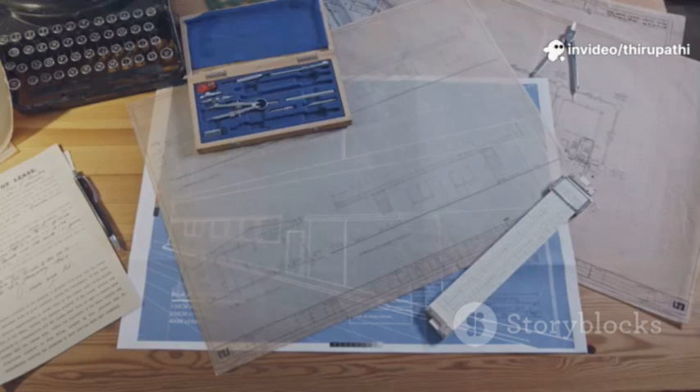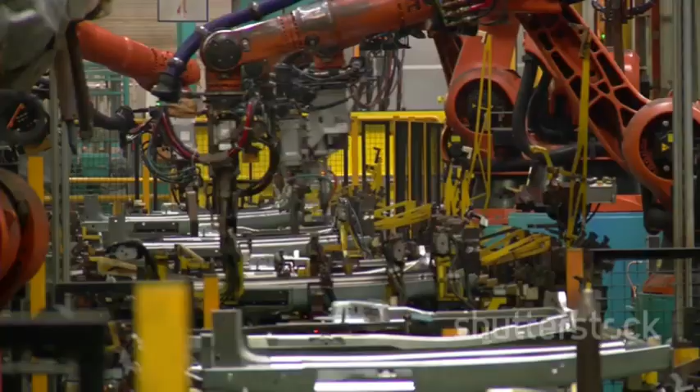Before the advent of glowing screens and complex software, there was wood, graphite, and steel. These were the fundamental tools of creation, the instruments that brought imagination to life. The world's cars, from their initial concepts to their intricate designs, buildings reaching for the sky, and complex machines, the gears of industry, all began on a drafting table, a massive tilted wooden board, a landscape for innovation.

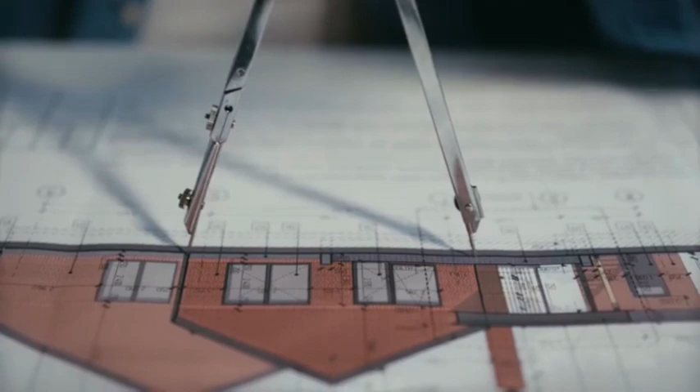It was here that ideas took shape, where visions were meticulously translated into tangible plans. Engineers used T-squares, sliding them across the surface with practiced ease, set squares, carefully positioned to create precise angles, and compasses for perfect lines and circles, ensuring accuracy in every detail. These tools were extensions of their minds, translating thought into form.

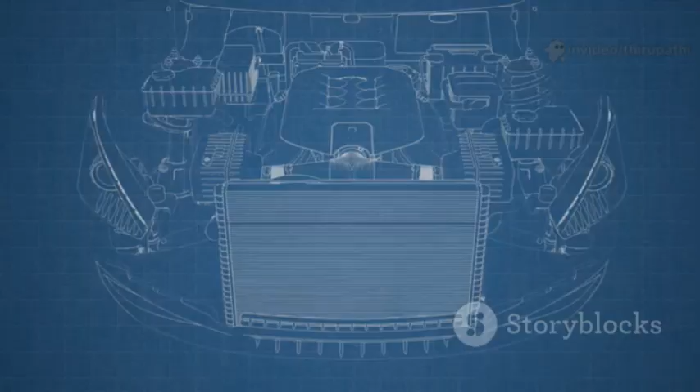Every line was a commitment, a decision etched onto paper. Mistakes meant hours lost, painstakingly correcting errors that could ripple through the entire design. Architects and engineers spent weeks hunched over vast sheets, their eyes scanning every detail, each line representing a real-world part, a component with a specific function and purpose.

Precision was everything, the key to success. One millimeter off, and a steel beam might not fit, jeopardizing the entire structure. There was no undo button, no quick fix, only careful erasing and hope you didn't tear the paper, a constant reminder of the fragility of the process.

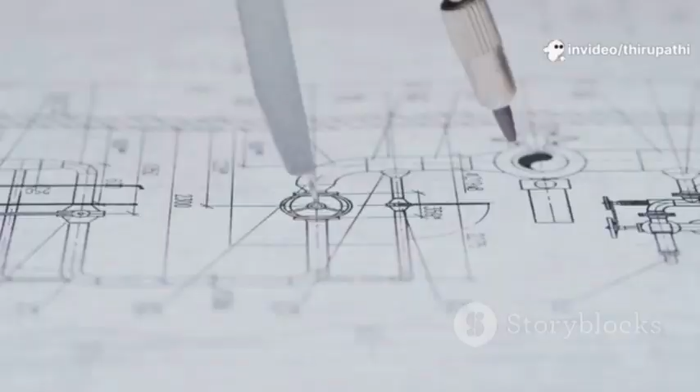This process demanded patience, a virtue often tested, visualization, the ability to see the finished product in your mind's eye, and deep understanding of the underlying principles.

Rooms filled with blueprints, stacks upon stacks, were the ultimate source of truth for builders and machinists, the guides that transformed drawings into reality. The discipline and foresight learned here in these spaces of focused creation laid the foundation for modern engineering, shaping the way we design and build today.

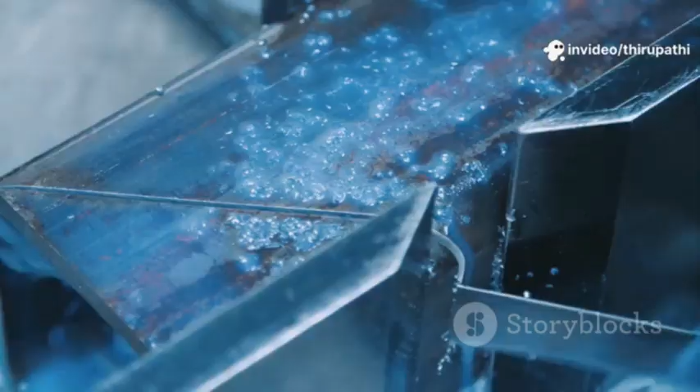You had to think in 3D, visualizing the object in its entirety, then translate it to 2D lines and symbols, a process of abstraction and simplification.

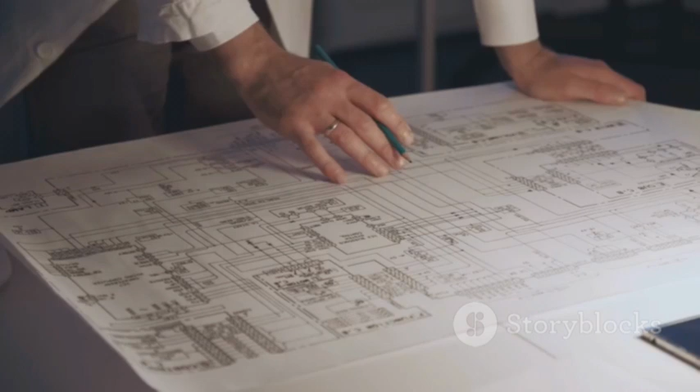This hands-on connection to design, the feel of the pencil on paper, is something we risk losing in the digital age, as we become more reliant on automated tools. But it taught engineers to plan every step before making a mark, to consider the consequences of each decision.

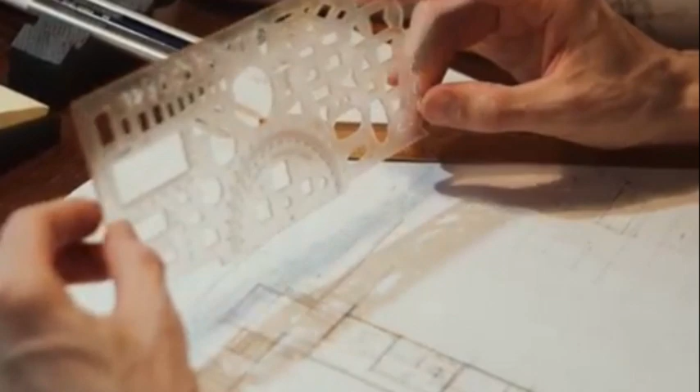The drafting table was the crucible where modern engineering was forged, a place of intense focus and creativity. It was slow, methodical, and deeply personal, a reflection of the individual's skill and dedication. Every project was a test of skill and patience, a challenge to overcome with ingenuity and precision.

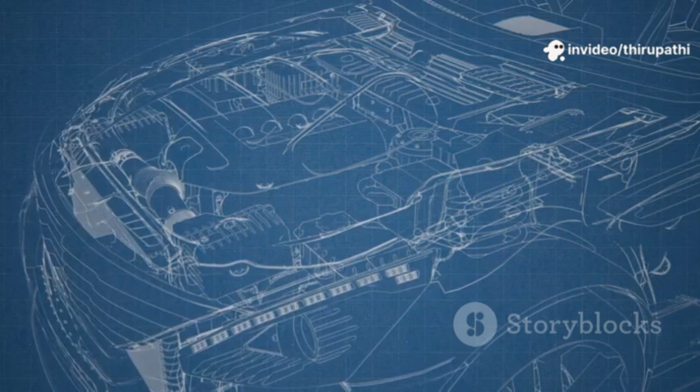The lessons learned here still echo in today's digital world, reminding us of the importance of careful planning and attention to detail. The roots of every skyscraper and engine, every bridge and airplane trace back to these tables, to the hands that meticulously crafted their designs. This was where the future began, where the seeds of innovation were sown, and where the world as we know it was first imagined.

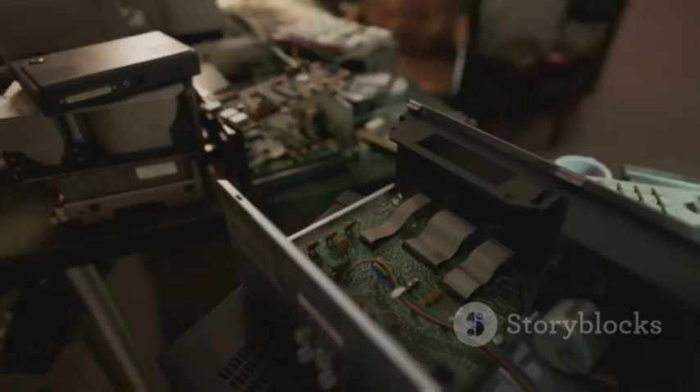Then came the computer, a monumental shift in how we approach design and engineering. It wasn't just a tool, it was a new way of thinking, massive, humming with the power of countless vacuum tubes, and deeply mysterious to those who hadn't yet grasped its potential. These machines filled entire rooms, their presence both imposing and intriguing.

Early mainframes weren't designed for drawing intricate designs or visualizing complex structures. They crunched numbers with relentless efficiency, processed vast amounts of data, and even broke complex military codes during the Cold War. They were the number-crunching powerhouses of their time.

But curiosity, as it always does, sparked innovation and pushed the boundaries of what these machines could do. Engineers and scientists began to wonder, could these computers be used for more than just calculations?

Ivan Sutherland's groundbreaking Sketchpad in 1963 allowed people to interact with the digital world in a completely new way, letting them draw directly on a screen with a revolutionary device called a light pen. This was more than just drawing. This was the birth of computer-aided design, CAD, a concept that would forever change the landscape of engineering and architecture.

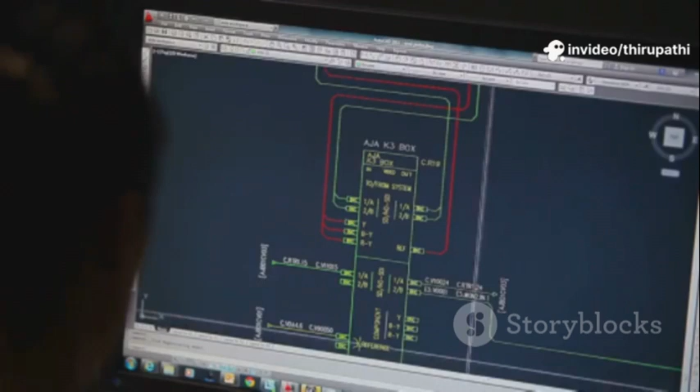Suddenly, instead of painstakingly redrawing entire blueprints, you could move a car door handle on a screen with a few simple commands, making adjustments and refinements without having to redraw everything from scratch. The promise, the tantalizing vision, was speed, unparalleled efficiency in the design process, and freedom from the tedious, repetitive task of redrawing everything by hand.

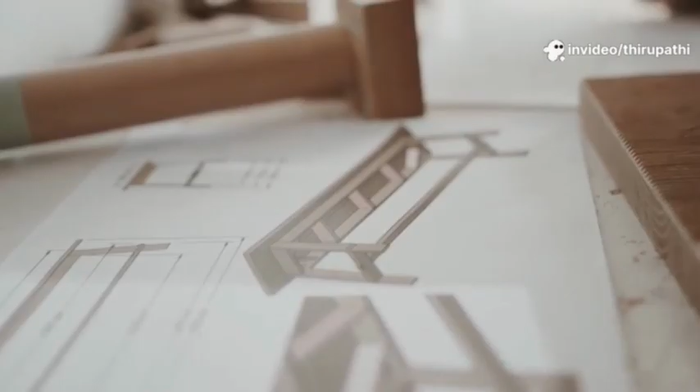Early CAD systems were undeniably expensive and incredibly complex, making them primarily reserved for the giants in industries like aerospace, where precision and innovation were paramount, and automotive, where the ability to quickly iterate on designs could lead to significant competitive advantages. The software itself was often slow and clunky by today's standards, screens flickered with an almost hypnotic rhythm, and the learning curve was steep, making it tough for many to adopt.

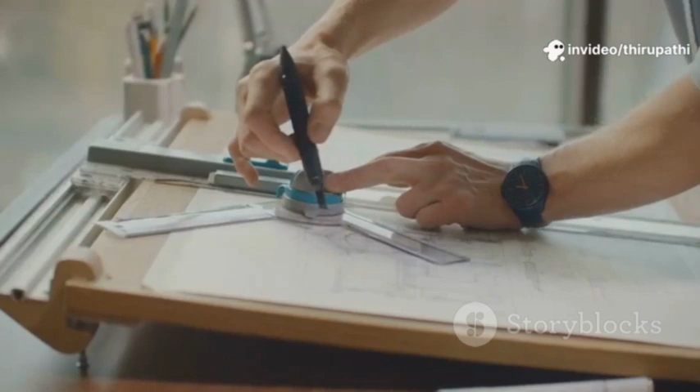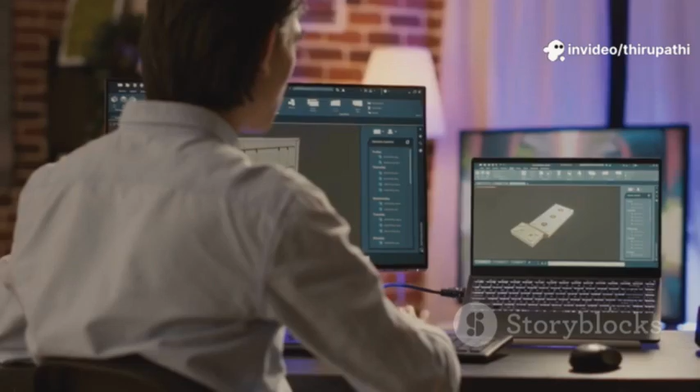Many engineers, comfortable with their familiar tools and techniques, clung to their pencils and drafting tables, skeptical of these newfangled machines. But the core idea, the potential, took root and began to spread: the realization that computers could not just calculate, but also visualize complex designs in ways never before imagined. This was a fundamental paradigm shift, a merging of traditional drafting precision with the immense computational power of the digital age. The digital age of design, though in its infancy, had officially begun.

Engineers started to see the potential for creativity and innovation, not just rote calculation and drafting. The transition from paper to pixel was slow, fraught with challenges, but ultimately inevitable. The seed of digital design had been planted, and it would soon blossom into a revolution. The traditional drafting table and the cutting-edge computer terminal began to share the same workspace, a symbol of the changing times. The future of engineering was rapidly changing, driven by the relentless march of technology.

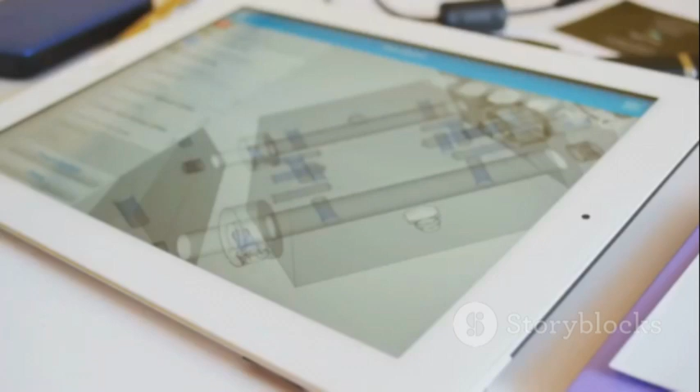The first tentative step toward the creation of digital blueprints, accessible and modifiable with ease, had been taken. The world of design, forever bound to the constraints of paper and ink, would never be the same again. The revolution had started, quietly at first, but with an unstoppable momentum. The age of CAD was officially here, ushering in a new era of innovation and efficiency.

As computers shrank in size and grew in power, a monumental shift began to take place in the world of design and engineering. The bulky mainframes that once dominated entire rooms were slowly giving way to more compact and accessible machines. CAD software, once confined to the realms of elite research labs and specialized institutions, started its journey into the mainstream. The promise of digital design was no longer a distant dream, but a tangible possibility.

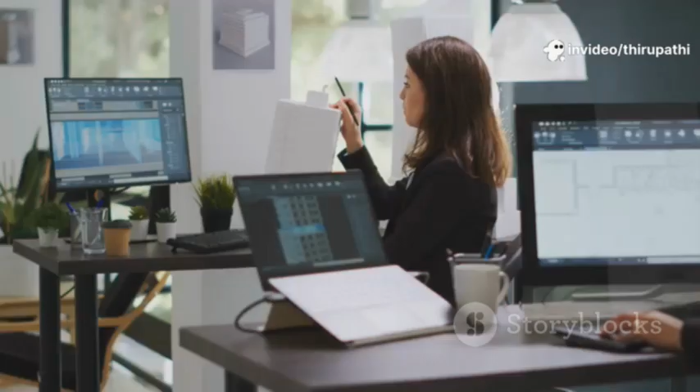Then came AutoCAD, released in 1982, a watershed moment that would forever alter the landscape of engineering and design. It was a game changer, a disruptive force that democratized access to powerful design tools. AutoCAD brought digital drafting directly to every engineer's desk, transforming the way they worked and thought about design. The era of manual drafting was drawing to a close, replaced by the precision and efficiency of the digital world.

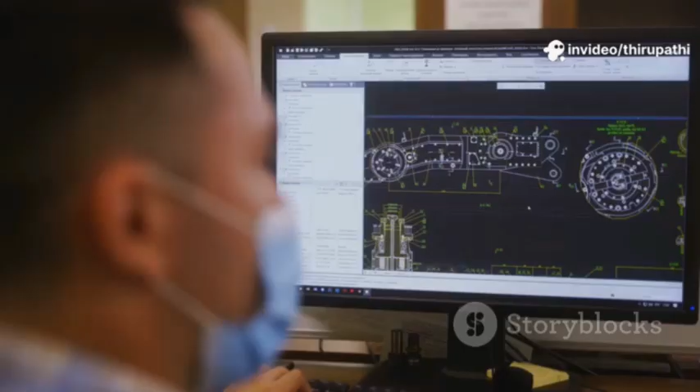No more million-dollar mainframes tied to specialized rooms and dedicated staff, just a PC sitting on a desk and powerful software capable of feats previously unimaginable. The barrier to entry had been shattered. Two-dimensional CAD effectively put the traditional drafting table right on the computer screen, but with superpowers that no physical drafting table could ever hope to match. It was a quantum leap in design capabilities.

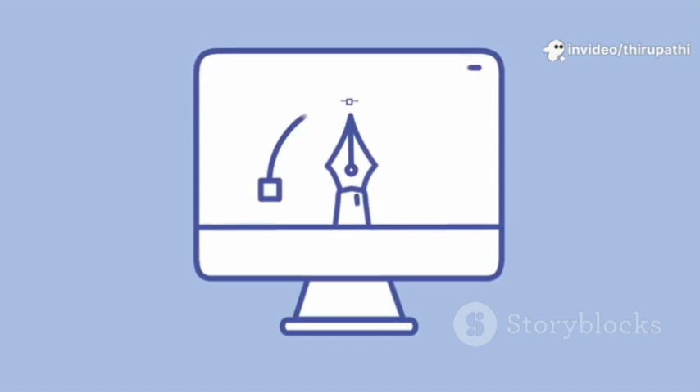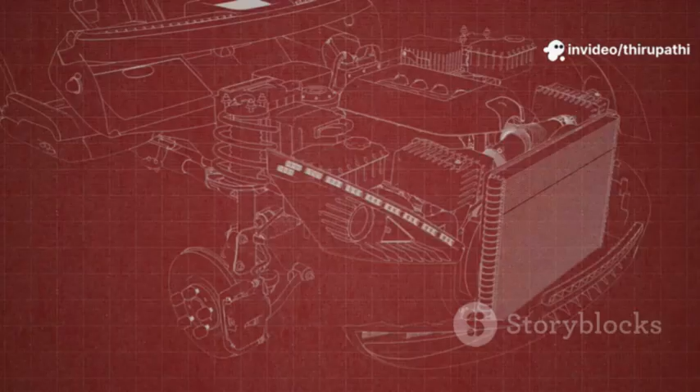Now, you could draw perfect lines and circles with a simple click of a mouse. No more need for a T-square or compass, or the painstaking precision they demanded. The digital tools were far more forgiving and efficient. The introduction of layers allowed you to separate electrical components, plumbing systems, and structural drawings into distinct, manageable elements, a feat that was virtually impossible to achieve with traditional methods on paper.

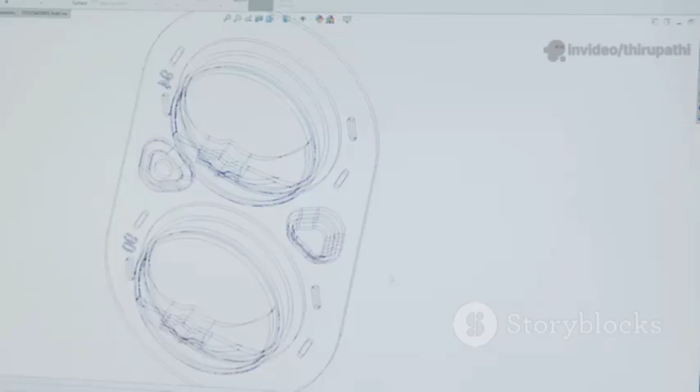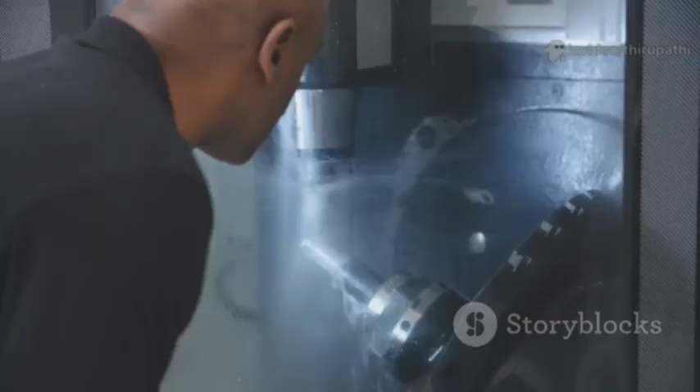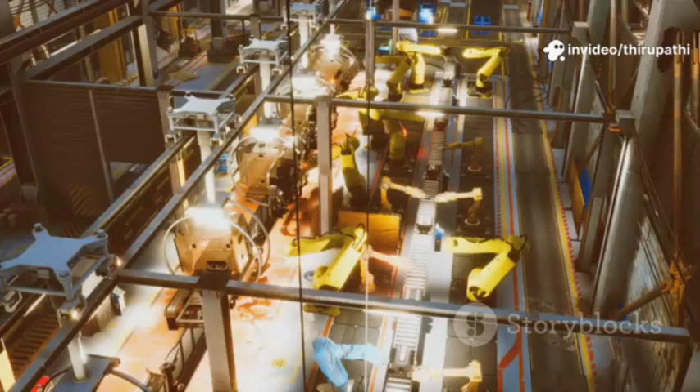Editing became instantaneous. Imagine being able to change every bolt diameter in an assembly with a single command. The level of accuracy soared to new heights, and the potential for human error plummeted, leading to more reliable and consistent designs. Designs could be updated and revised with ease, and then sent to manufacturing facilities in mere moments, streamlining the entire production process. These digital files could then be fed directly into CNC machines, creating a seamless link between the initial design and the final production of the product. The result: better products built faster with significantly fewer mistakes and a higher degree of precision. Suddenly, small firms could compete on a level playing field with even the largest industry giants.

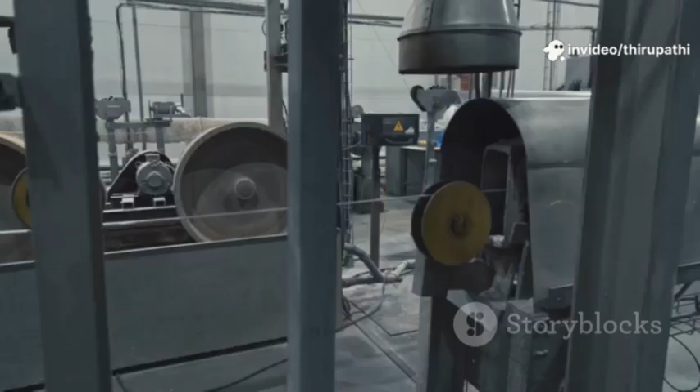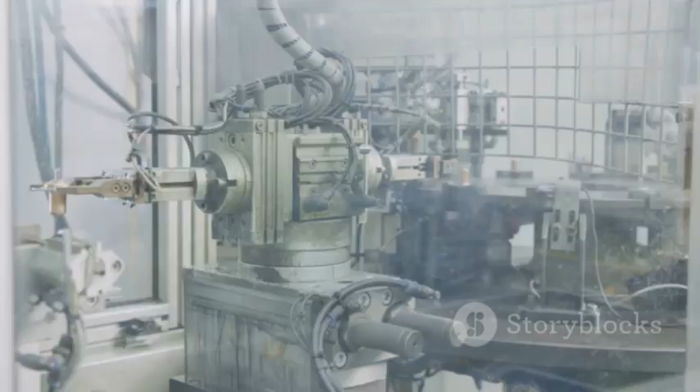The digital blueprint was officially born, revolutionizing manufacturing and ushering in a new era of industrial transformation. The entire process became cleaner, reducing waste and promoting sustainability. It was faster, more efficient, and far more organized than anything before. The foundation for the next great leap in design and engineering was set. The world of engineering was democratized, opening opportunities for innovation on a global scale. The era of the digital blueprint had arrived, transforming industries and reshaping the future of design.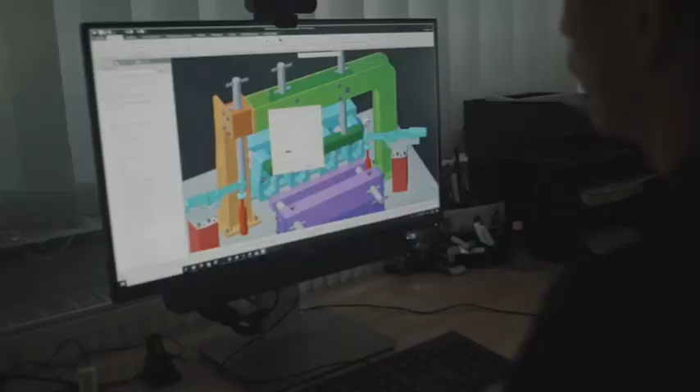With 2D CAD firmly established, the stage was now set for the next revolution: the advent of 3D design. The world isn't flat, so why should our designs be? 2D CAD required engineers to imagine 3D objects from flat drawings, a risky mental leap.

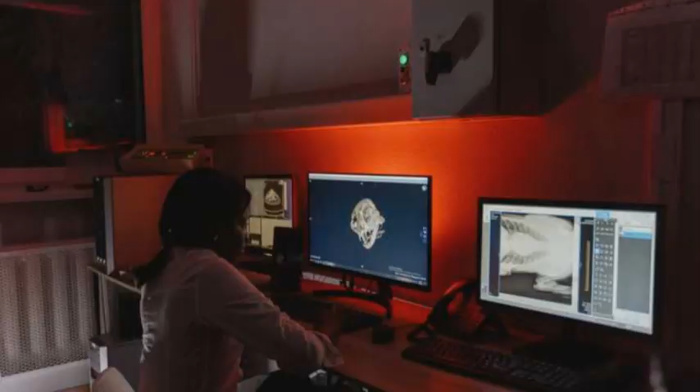Enter 3D CAD software like CATIA and SolidWorks, letting you build virtual objects, not just draw them. Sketch a profile, extrude it, cut holes, round edges; now you're sculpting, not just drafting. Rotate, slice, and inspect your model from any angle, instantly seeing if parts fit or clash, no more guesswork.

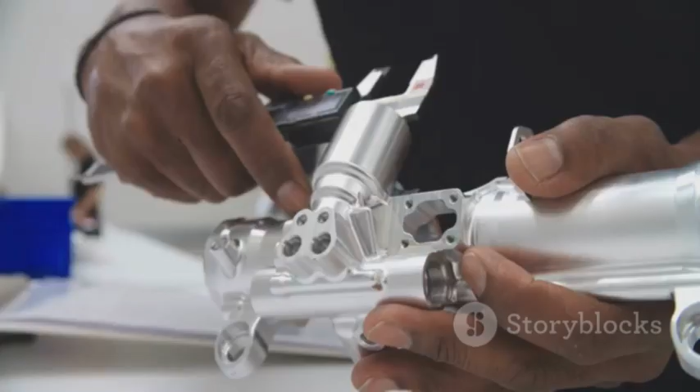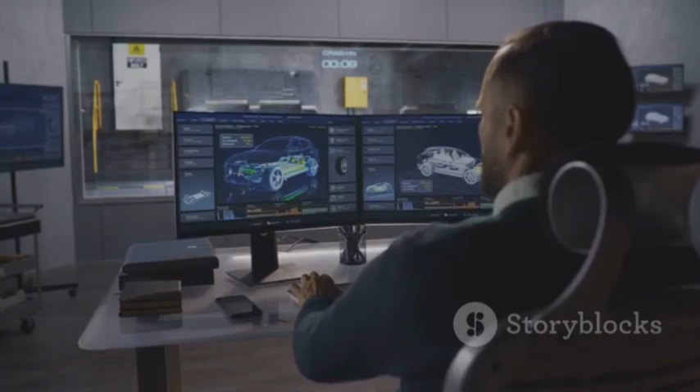Prototyping costs dropped, and creativity soared. Complex, organic shapes became possible, think of a car's aerodynamic curves. 3D modeling unlocked new levels of innovation and efficiency. Engineers could now design, test, and refine in a virtual world. The leap to 3D changed everything.

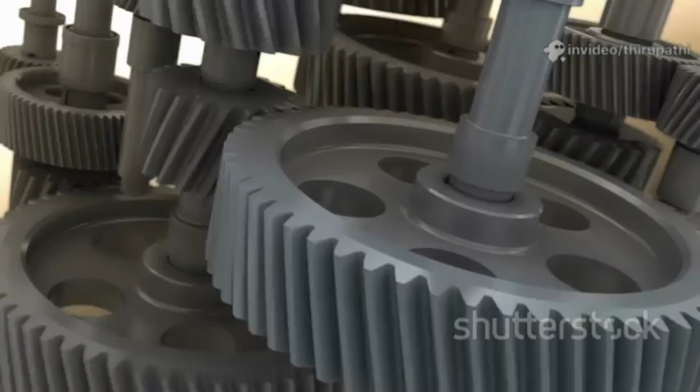3D was huge, but parametric modeling was the real game changer. Now designs had intelligence. Change one parameter and the whole model updates. Imagine a bookshelf: adjust the height, and every shelf resizes automatically. Assemblies took this further, combining parts and defining how they fit, with the software enforcing real-world constraints. It's like Legos that know how to connect.

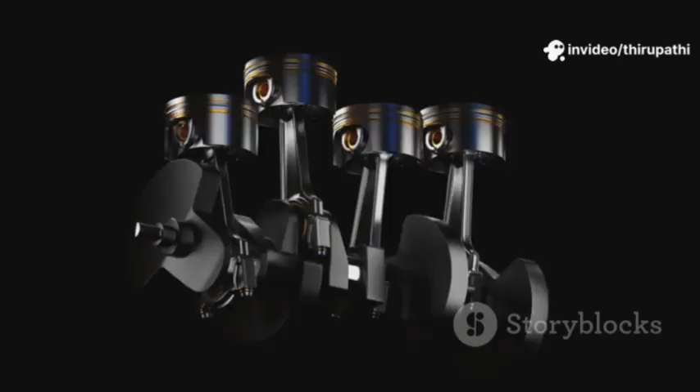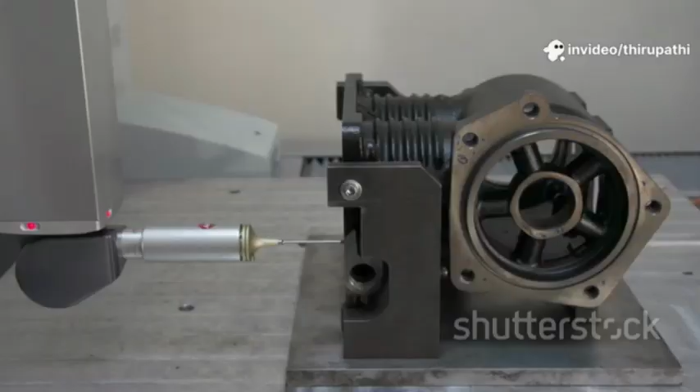Jet engines with thousands of parts are built and tested virtually first. Change a single blade and the whole engine adapts. Errors are caught before anything is built. This digital flexibility enables rapid innovation. Complex machines are perfected in the virtual world. Parametric design means faster changes, fewer mistakes, and smarter products. The digital prototype is now the heart of engineering. The future is adaptable by design.

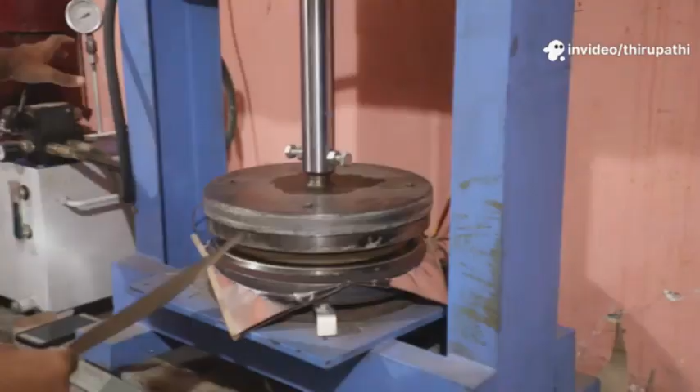With a perfect 3D model, it's time to test virtually. Finite element analysis, FEA, lets you stress test parts on your computer. Apply forces, heat, or motion, and see where your design bends or breaks. Color-coded maps reveal weak points instantly. No more expensive, time-consuming physical prototypes for every change.

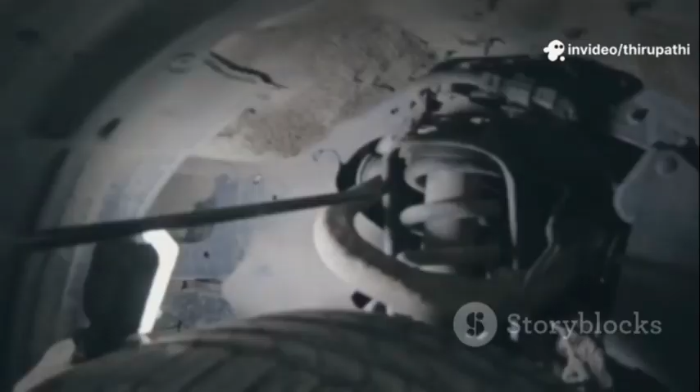Simulate airflow, heat dissipation, or suspension movement with a click. Optimize by removing material where it's not needed: lighter, stronger, better. Digital testing means faster iteration and smarter designs. Engineers can innovate at the speed of thought. The virtual lab is open 24/7. The best ideas survive before a single part is made.

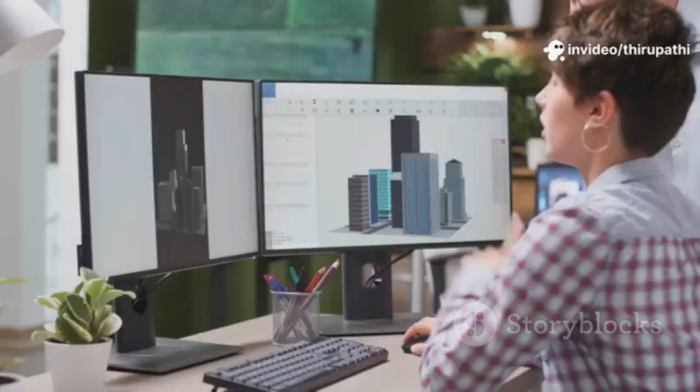Collaboration used to be slow, files sent back and forth, versions lost. Cloud-based CAD changed everything. Now teams worldwide work on the same model in real time. Changes are instant, conflicts flagged, and everyone stays in sync. Managers, clients, and suppliers can view and comment from anywhere. The global workshop is always open. Innovation moves at the speed of the internet. Engineering is now a truly connected conversation.

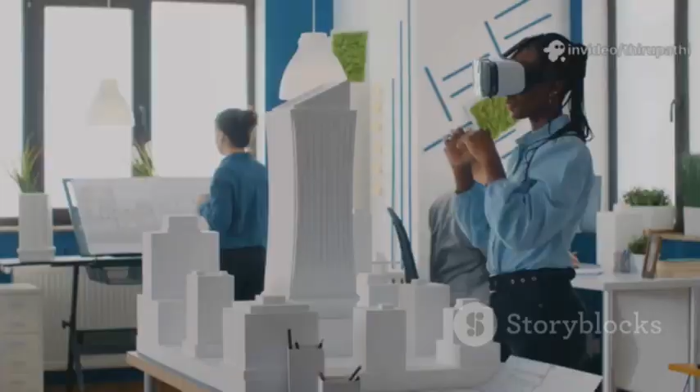The frontier now is blending digital and physical worlds. VR lets engineers step inside their designs, walk around, and collaborate virtually. AR overlays instructions and data onto real objects, repairing and building with digital guidance.

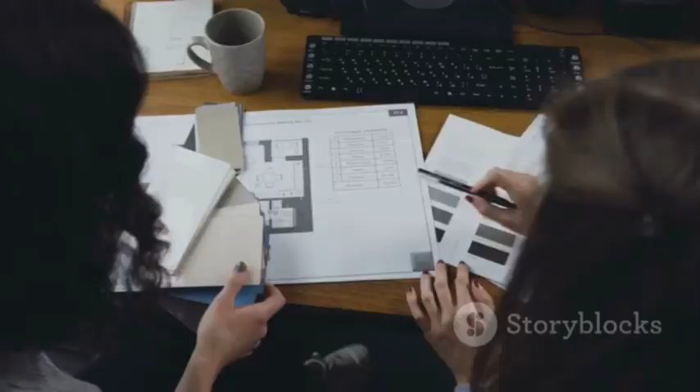Generative design flips the script. Tell the computer your goals and AI invents thousands of solutions. The results are organic, efficient, and often surprising. Engineers become directors, guiding AI to the best answers. Human creativity and machine intelligence combine for supercharged innovation. These tools aren't science fiction, they're here now. The future of design is immersive, intelligent, and collaborative.

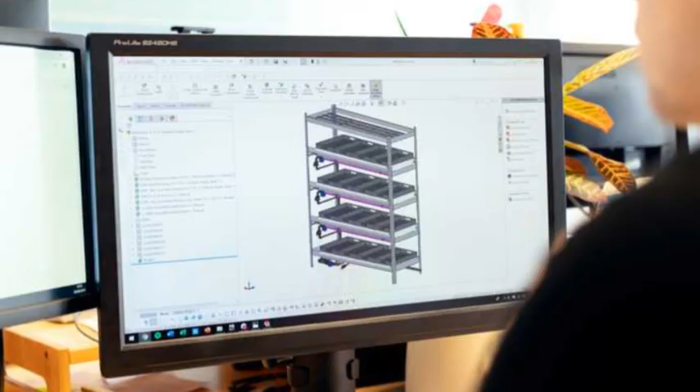The next leap is already underway. From pencil to pixels, every tool has unlocked new possibilities. The drafting table taught discipline. CAD brought speed and precision. 3D modeling made ideas real. Simulation and the cloud connected and accelerated us. Today's tools are more powerful than ever, available to anyone, anywhere. VR, AI, and generative design are just the beginning. The real power lies in your hands.

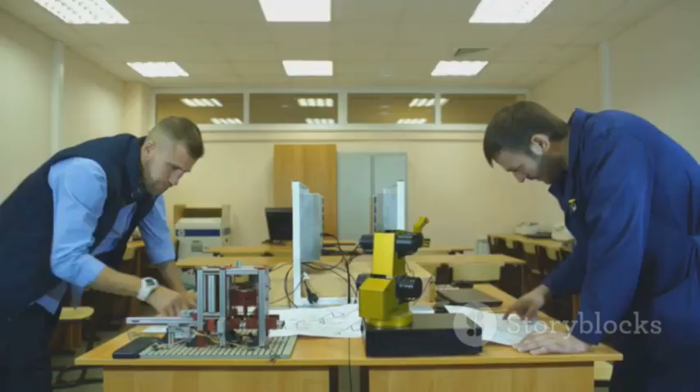What will you build? What problems will you solve? Push the limits, break the software, and invent what comes next. The future of engineering is yours to shape. The digital forge is lit, waiting for your ideas. The world is full of challenges and opportunities. Go build something amazing. The next chapter starts with you.